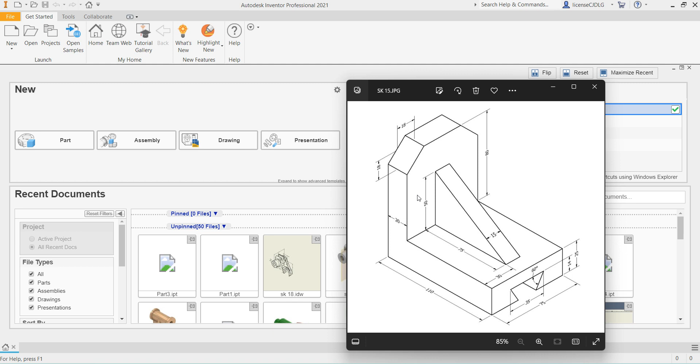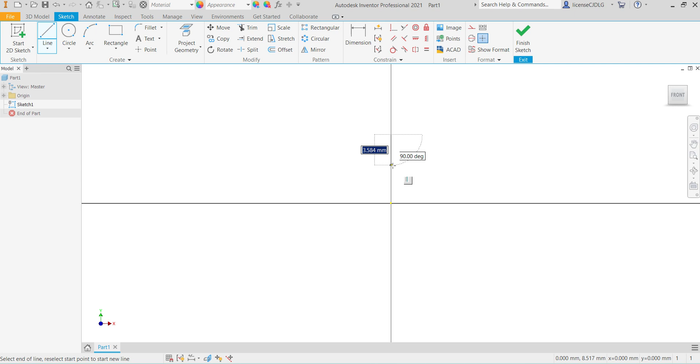Select 2D sketch, select plane, select line, give the dimensions, this is 110, this is 80 plus 25, 105 mm.

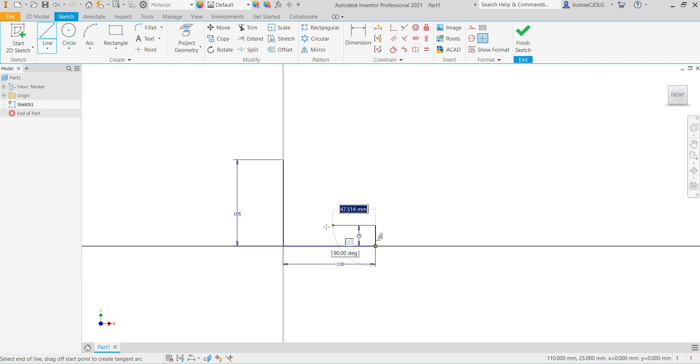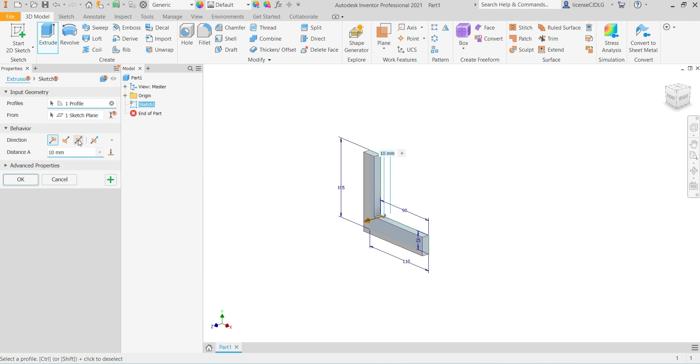Again select line, 25, this is 110 minus 20, 90 mm. Sketch is fully constrained, finish sketch, select extrude, select mid plane, 75 mm.

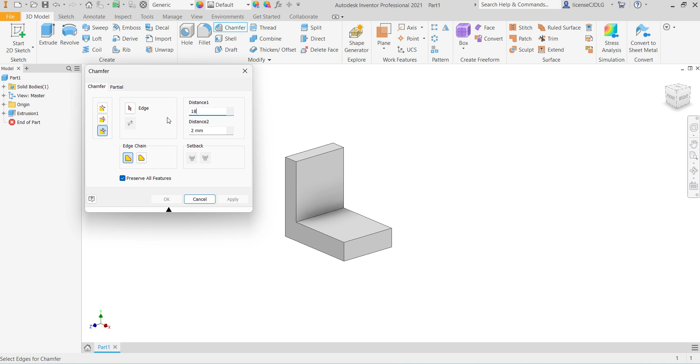Next there is a chamfer 18 into 18, select chamfer, select here D into D, 18, select the edges, apply.

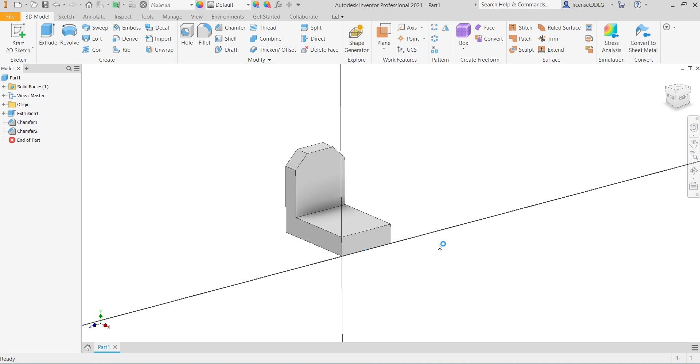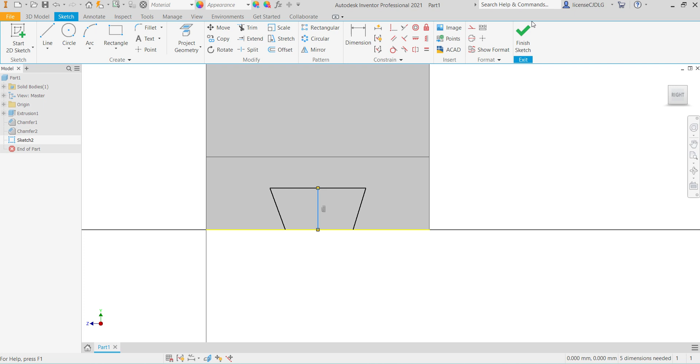Next there is one cutout, overall length is 35 mm, height is 14 mm and 60 degree. Select this surface, sketch, select line, select this line, give vertical constraint and select same line, change it into construction, select symmetric,

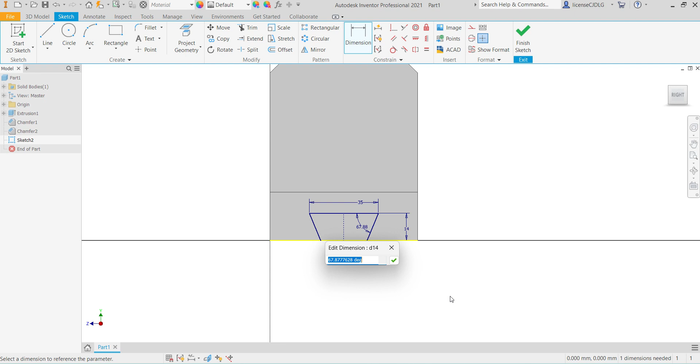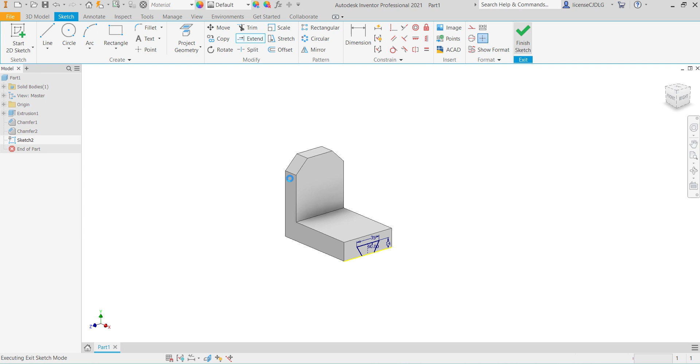this is 35 mm and height is 14 mm and here to here 60 degree. Finish sketch, select extrude. I think this sketch has some open points, yes. Select extend, extend this, that's it. Finish sketch, select extrude, reverse the direction, select through all, OK.

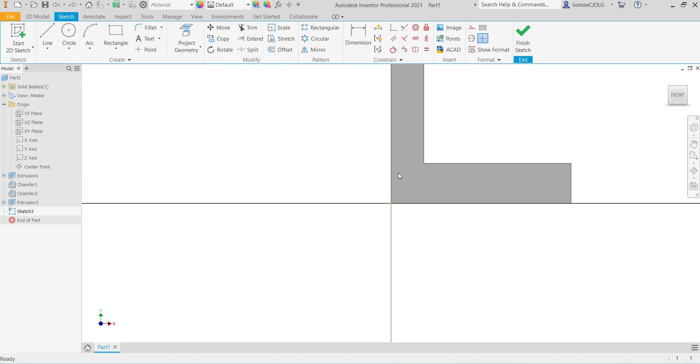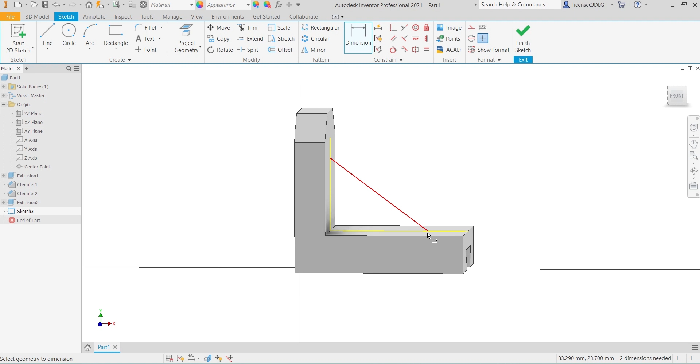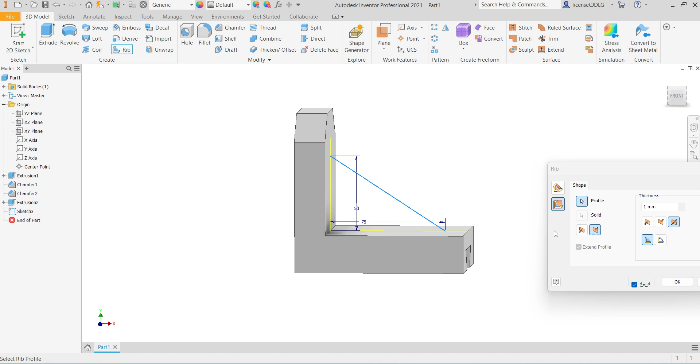Next there is a 15 mm rib. For that select plane, sketch, select line, give the dimensions, 75 and 50 mm. 75, 50. Finish sketch, select rib, thickness we want 15 mm. Okay.

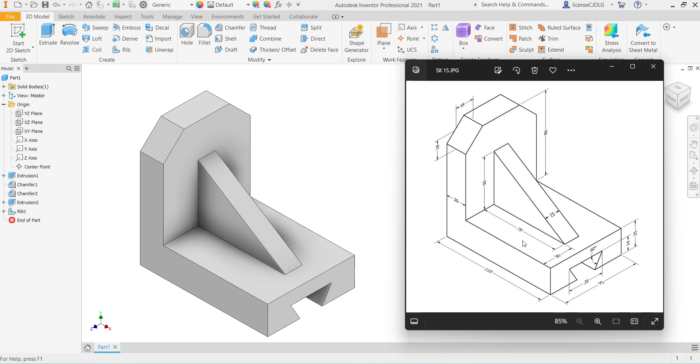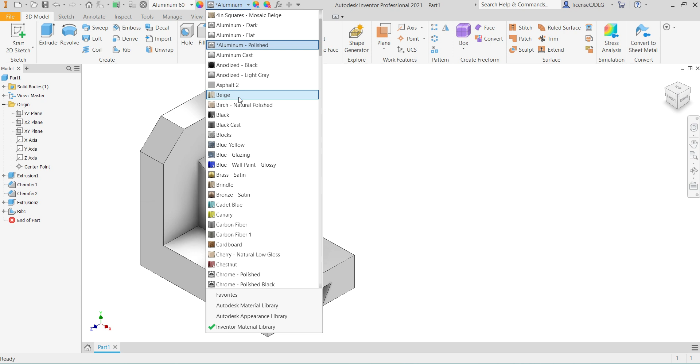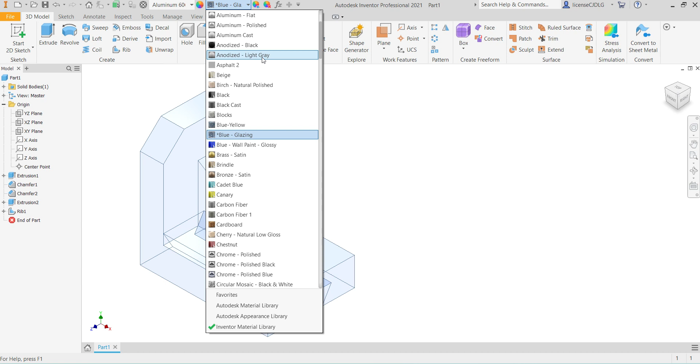That's it, friends. Assign the material here. I will go with aluminum 6061 and I will give the finish aluminum polished or I will go with aluminum polished only. Save the part.